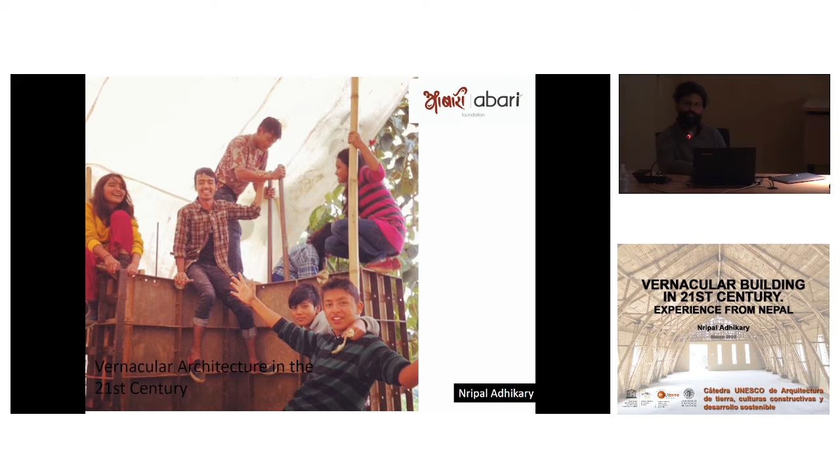And it was not associated with poverty, but associated with wealth. I was very impressed. I was like, we have amazing architecture in Nepal.

If you know Nepal, it's between Tibet, the China border and India. So there is a lot of confluence of different culture, different geography. A lot of people, when they think of Nepal, only think of the mountains, of Mount Everest, but we have plains also. When I was going this morning with Fernando, the rice field reminds me of home. And also we have the mountains, of course.

So between these two geographies, we have a lot of interesting architecture. And the interesting part is it's still alive, but slowly it has a bad image of poverty, even though it's still alive.

So for example, you see a lot of buildings here. These are buildings up in the Himalayas with rammed earth, and also in the mountains you have adobe, but it rains a lot, so we don't have flat roofs. Here we have tiles, but this is all adobe. Interestingly, we don't use a lot of lime, but we use a lot of earth, and a lot of adobe.

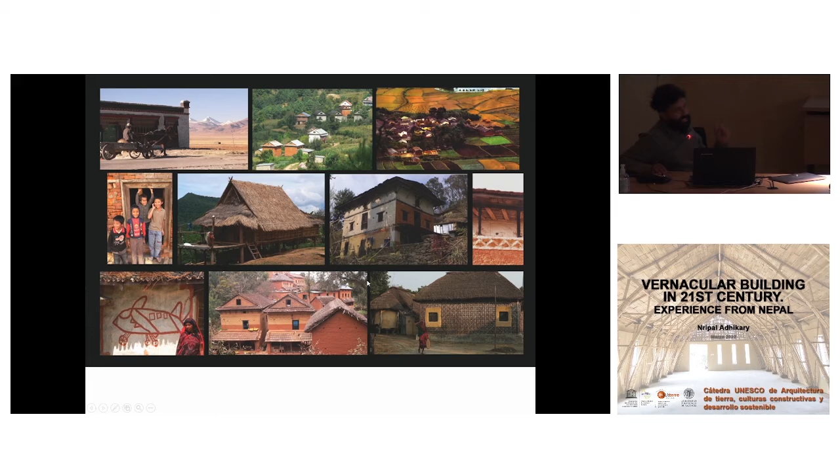And I've been doing a lot of studies and documenting them. For example, this house is about 300 years old, made with burnt bricks on the outside and adobe on the inside, a lot of wood. Mostly what happens in traditional architecture, the material is free because you just go to the forest, you get your wood, you have stones everywhere, you have earth everywhere.

And we have this really interesting tradition of helping someone else build a house. So if I'm building my house, my neighbors will come and help me. And we keep track of how many days: if he comes and helps for 5 days, I have to go and help him for 5 days. That tradition is slowly dying, but whenever people built these structures, that was how they did it.

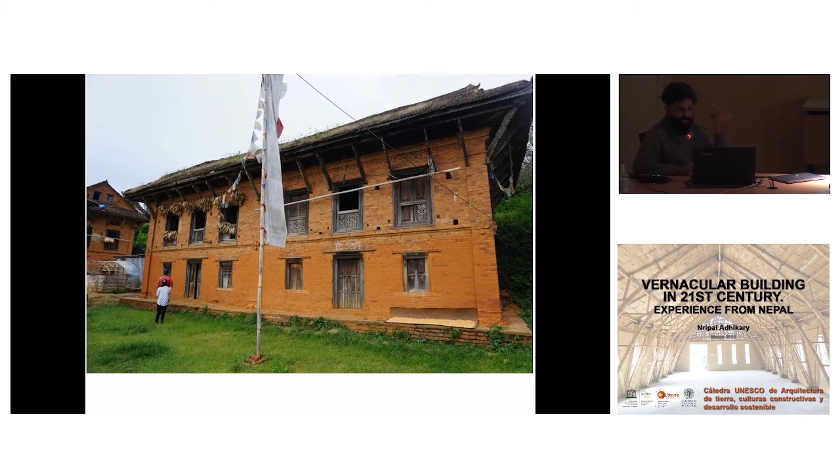Or if you go in the mountains, you have this stone architecture, all dry stack stone. This would be around 5,000 meters. There's a lot of earthquakes, but they have a very interesting technique of tying with wood for reinforcement, like here.

And they have like a courtyard. For example, the roof of this is a road for the neighbor's house, so it's all connected.

Or in the plains, we have this earth architecture, and there's a lot of rain, so a lot of what we call maintenance, but they don't see it as maintenance, they see it as a ritual. For example, every time it rains, after monsoon, they come and they paint their house with different colors, all natural colors, pigments. So, really interesting traditions, which are still alive.

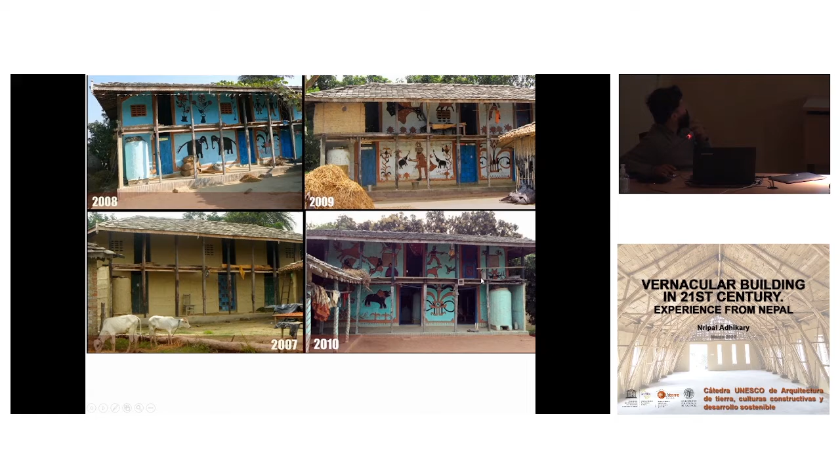Or like some traditions are unfortunately dead. For example, this bamboo bridge, about 30 meters, built in 1895 with bamboo. But this tradition is gone because no engineering school teaches it, no architecture school teaches it. And this is a sign of poverty, right? Even though it uses everything local, everything, it has so much craft involved.

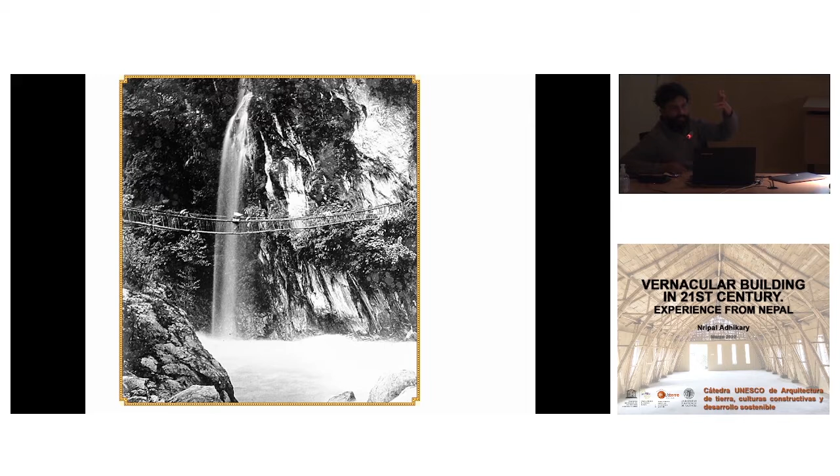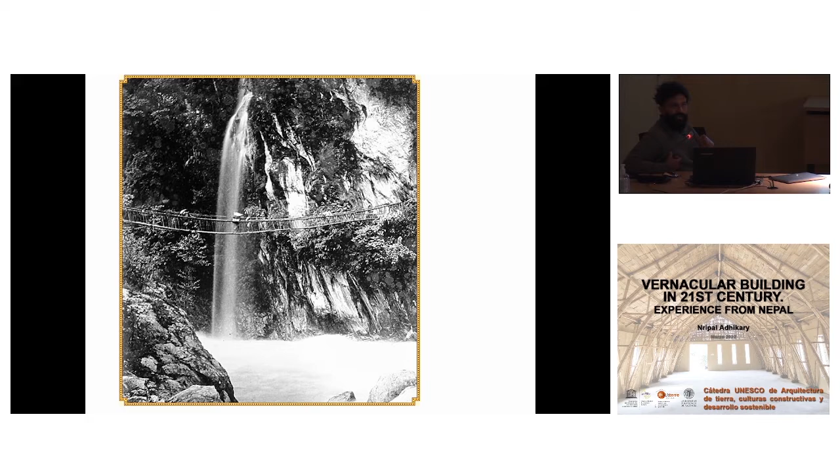Or another suspension bridge, which we have here. And so the tradition is lost. And in Nepal, there's a lot of inaccessible areas, so there are places where we cannot bring foreign materials, or we don't have the economy to bring foreign materials. So people cannot afford it, and they have to use a very scary way to cross the bridge. This is not Photoshop, this is real. Like this, you have a steel cable, and kids are crossing to go to school every day.

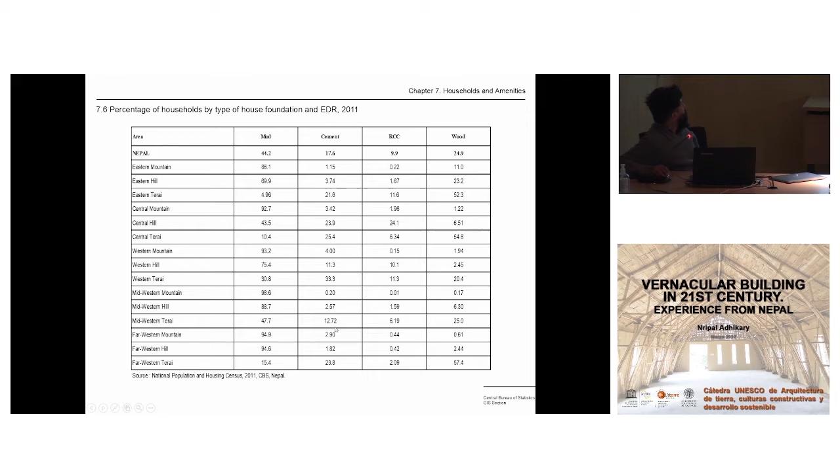So there's a lot of contradiction between what we have versus what is our aspiration, right? And just to make this point clear, for example, the whole country of Nepal, the cement level is only 17%. This is the whole country. And in some areas, there's as little as 0.2% cement. This is according to the census of 2011. A lot of wood, a lot of bamboo, a lot of stone, a lot of adobe.

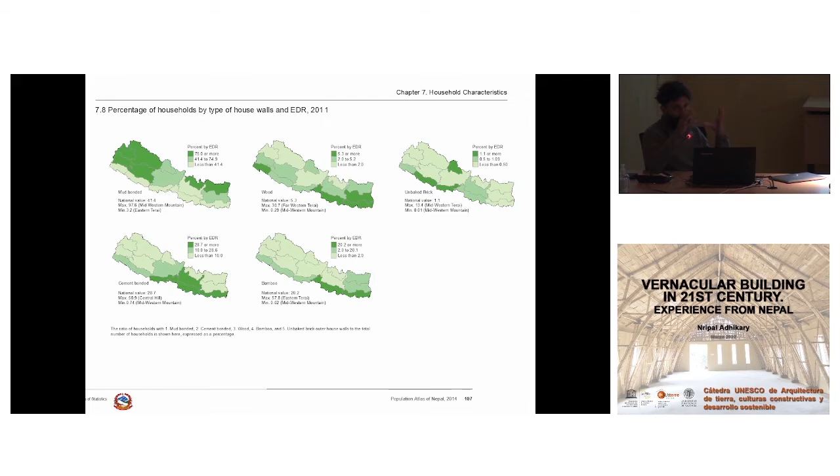And if you, I don't know if you like the image of Nepal, whenever people think of Kathmandu especially, there were a lot of hippies that went to Kathmandu in the 70s. So it has this image of Shangri-La, right? And it does have one of the highest number of World Heritage Sites, about 10, cities, not only structures. And here's like one area.

This is not a World Heritage Site, but this is one neighborhood. You see beautiful earthen buildings, 2-3 story. This is in 1967, and then you'd have nice rice fields in front of the house. Sometimes reminds me of your architecture here.

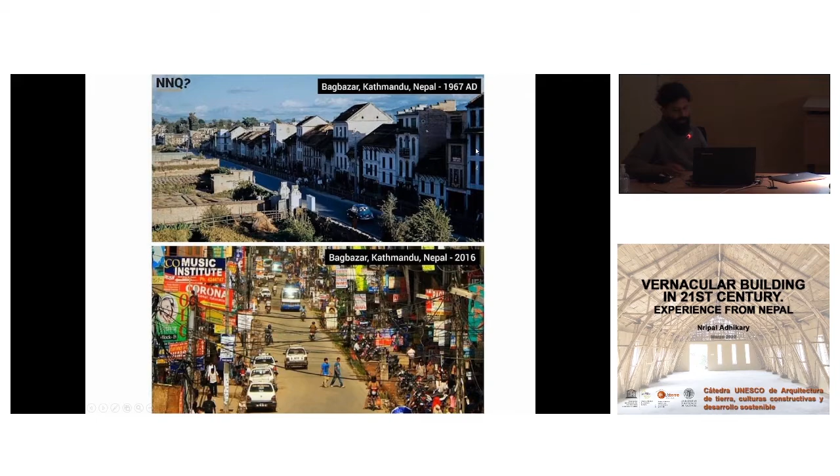But this is what we've done to the same buildings now, with concrete, right? This is with urbanization. It's gone from such a Shangri-La to become a concrete jungle. And this is what we have now in Kathmandu.

It's terrible. But why, even though we have an amazing history of vernacular architecture, why are people building with cement, right? There's nothing that traditional material can't do that modern can, but it's even better actually in terms of thermal performance, because there is that illusion that cement is strong and that it will last hundreds of years.

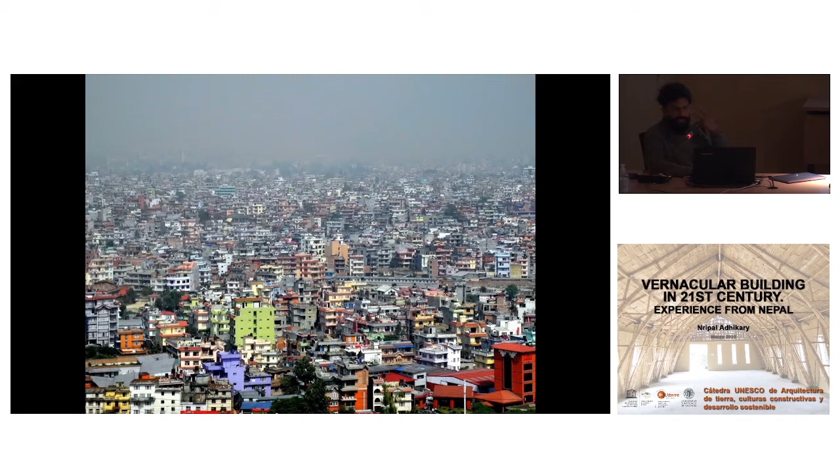But in the last earthquake, you know, this is at the epicenter, the concrete buildings also collapsed like a house of cards, you know, there is nothing you can salvage from this. And it costs a lot of money, there's nothing recyclable.

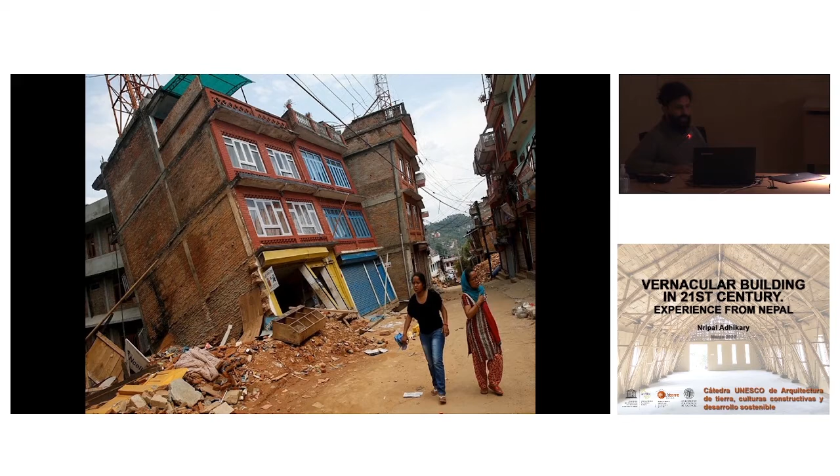So, on the other hand, properly built stone buildings, this is also taken from the epicenter of the earthquake. It can survive, right? So in this context...

I wanted to do something, as a young architect. I didn't want to conserve, because the tradition is still alive, right? It's not like the European context where it's losing, where you need to conserve. But the biggest problem was, how do you take this tradition and put it in a modern context, right? The skill set is there, the material is there, but no architect had taken it to put it in today's sensibility.

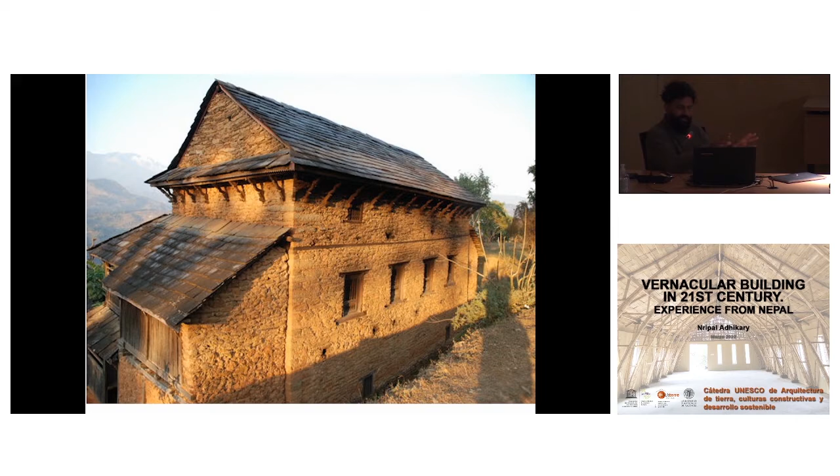So I started this organization called ABARI, to take tradition and put it in modern context, right? So this was what we wanted to do, take vernacular and put it in today's context.

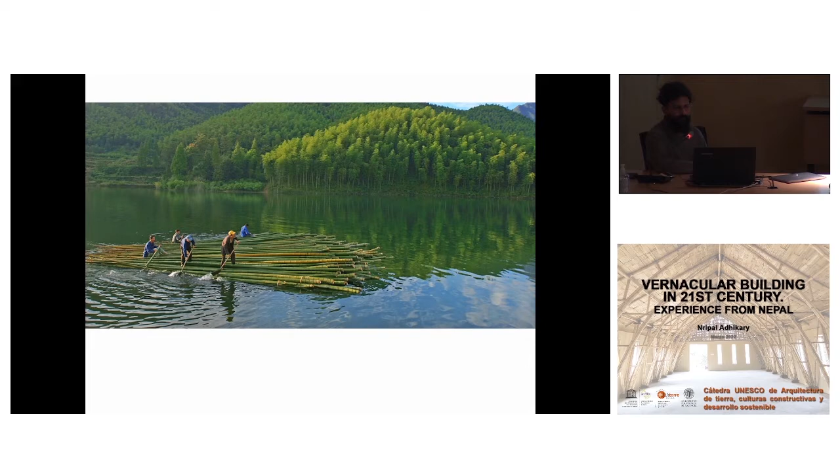And two of the main materials that we used are bamboo, of course, and earth. Earth because, as I showed you, it's everywhere. It can be earthquake resistant because it's a monolithic, thick structure. And bamboo because it's very lightweight and delicate. For people who are not aware of what bamboo is, it's basically grass, the same family as rice, right?

So the more you cut it, the better it is. It grows faster and better. And we have about 54 species of bamboo.

In terms of strength, it can be as strong as steel in tension. A lot of people compare it to steel, but I think it's even better because steel is strong but heavy, while bamboo is strong but lightweight. So you'd rather compare it to materials like carbon fiber, which is used for airplanes. In terms of density, it's like bird's bone—very lightweight and earthquake resistant. If there's an earthquake, like we've seen in our buildings, it moves like a spring and comes back to shape. It's really interesting.

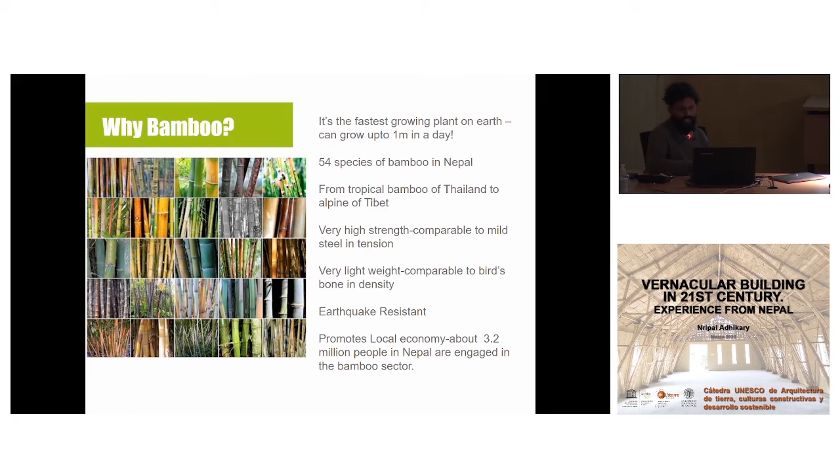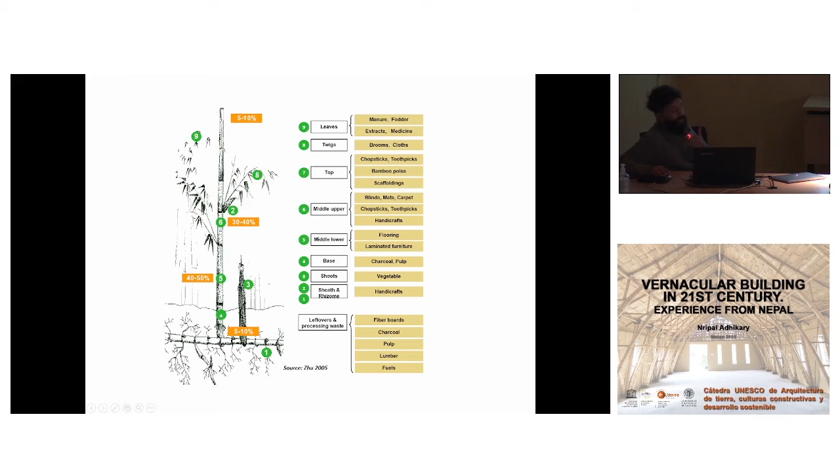We have a lot of people engaged in this sector. And with bamboo, nothing goes to waste. For example, if this is a bamboo plant, the leaves you can use for fodder. When it's small like this, you can eat it. When it's big, this portion you can use to make fibers. The bottom you can use for construction. It's amazing—we call it vegetable steel. It's such an amazing material.

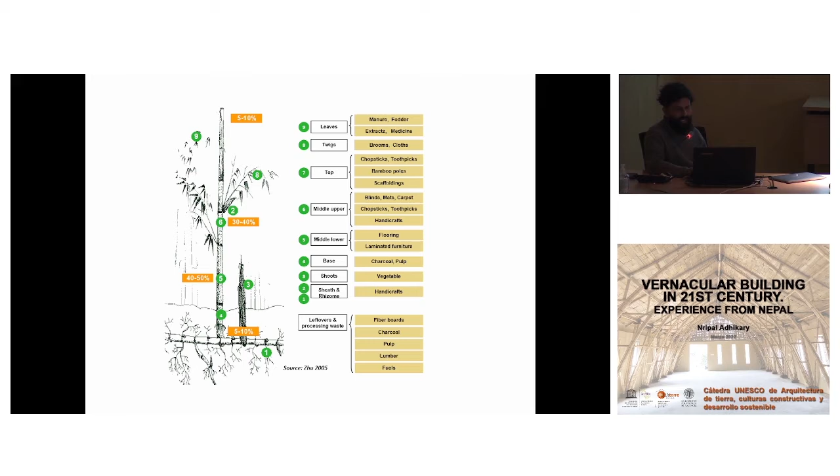So when it's less than 30 days old, you can eat it. Up to one year, you can make it into fibers. And when it's old, you can use it for construction. So it's something that can give you fibers, food, and construction material. It's an amazing material, and if you look at where it's found, it's mostly in the global south.

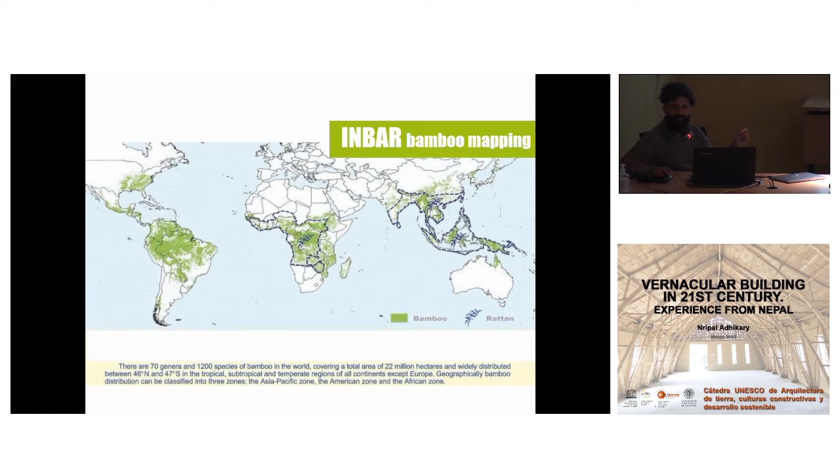My correlation is that areas which eat rice use bamboo, because it's the same family. And if you zoom in with a microscope, you see bamboo is a collection of tubes. Tubes are one of the strongest shapes in construction geometry. But this is even more interesting because it's a composite of tubes—you put these tubes together and they work as one unit, so it has a lot of fibers and can move. Because of these long fibers, it's also used in fabric.

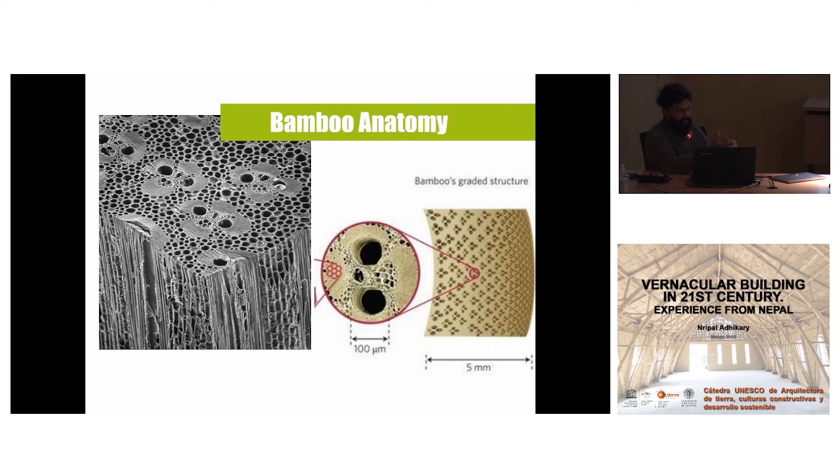All these tubes are also like leaves—they're also doing photosynthesis. That's why it grows so fast.

But if it's such a good material, such a strong material, why aren't people using it? That's the main question. The main issue is that it has a lot of chlorophyll in the stem and a lot of sugar, which makes it more susceptible to termites. If you look at these tubes, you can see a lot of these sugar modules. Because of that, it gets infected by termites.

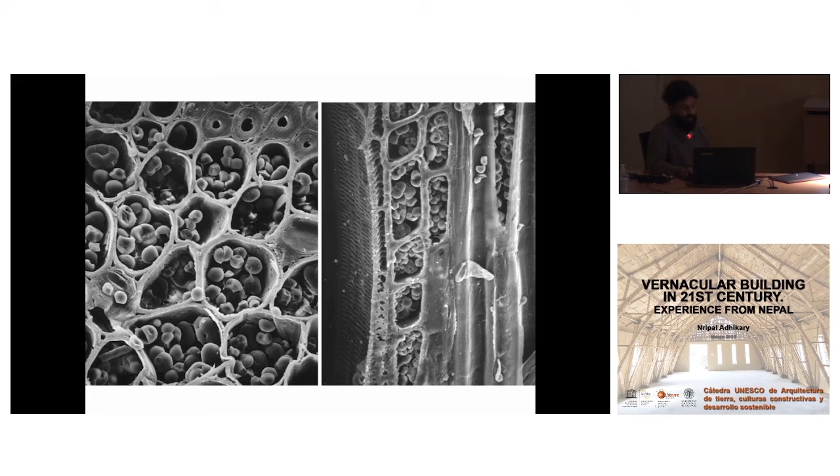So we did a small innovation. We took a cylinder like this and added a preservative, boron compound, and used a bicycle pump to create pressure in that preservative so it's pressurized. Once pressurized, we have a pipe connected to the ends of the bamboo. When you connect it to the ends, the pressure pushes the starch and sugar out, and then you replace it with the boron compound. It's amazing—a very simple technology but very effective, because you can take it anywhere, you don't need electricity.

So we did a lot of construction with that, but as we grew, we also built a centralized industrial plant. That was one major innovation—extending its life. Usually if you don't treat bamboo, it lasts 3 years, but if you treat it, it can last 100 years. That was a major innovation we did.

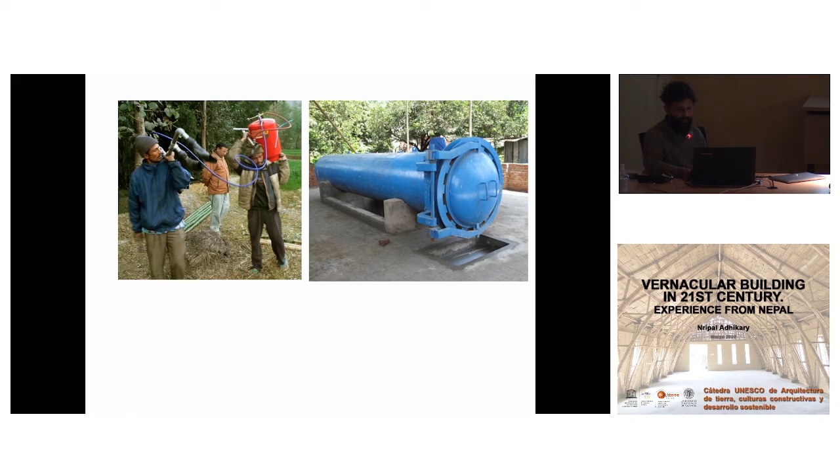Another innovation we did was the joint. Bamboo is hollow inside, so it's not like timber that you can cut into a fixed geometry—unless you do lamination, like they do in China, where you take strips and laminate and build. But that's a very industrial process and makes it expensive. So we wanted to use round bamboo because it has amazing properties. But the problem with round bamboo is that you can't cut the geometry, and it's not perfectly round, so we had to devise a joint that would handle all the asymmetries.

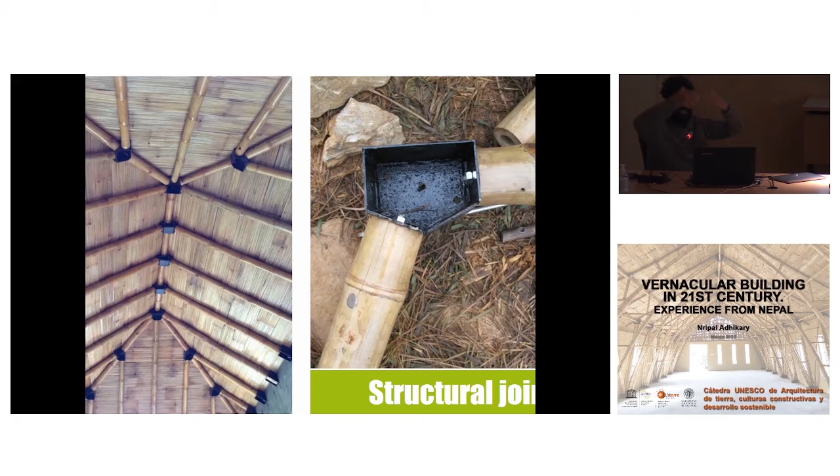So we designed a very simple metal system, like here—we use this IKEA-type joint to connect two pieces together. You can connect more pieces if you need. That was a major innovation that really helped in making large span structures. After this, we felt we'd solved these technical problems, so let's start building. My interest was to build public structures.

Private structure is tricky because people don't want to be the first one to build like that. But public spaces, schools, people are more open towards doing that. And also there's more need for public spaces. If you look at vernacular architecture in the beginning, they have smaller structures for homes. But more public structures like schools and hospitals are more like a modern innovation. So we need vernacular architecture to do this.

So my first project was to build a community hall where we use bamboo. We took bamboo and made an arch, like bent it and built this structure, kind of like a Gothic arch, bundled them together and bent it. For a first project, it was pretty successful, it was very strong, and people really liked it.

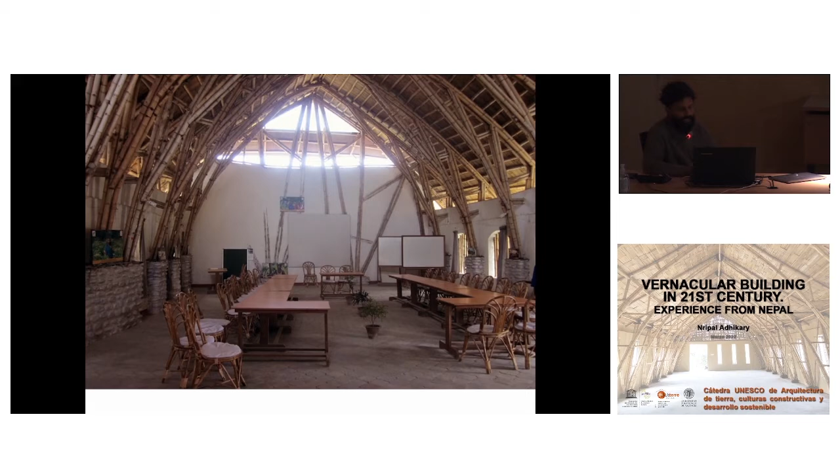One of the major outcomes was there was a lot of acceptance. People were like, oh, this is interesting. And then the second project was I did a school.

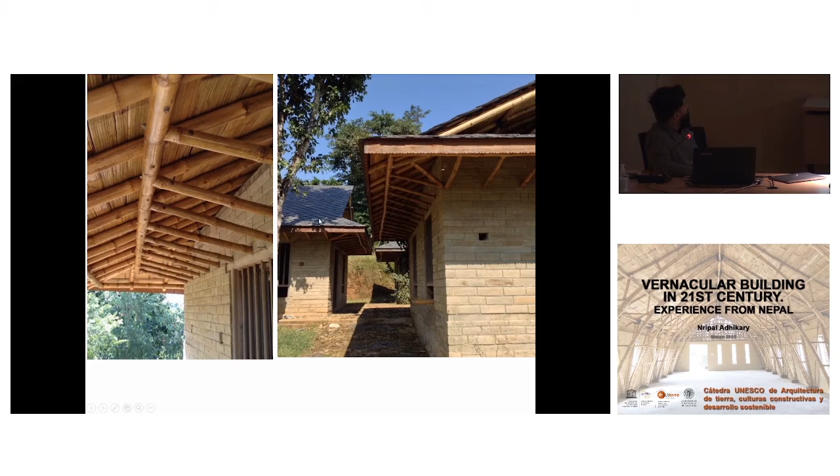It took a lot of time. After this, I was very tired because it took almost 3 years to build this. It was very amazing to see that you can build something with local material, you can build something beautiful. But it was too difficult, and I was like, okay, I can't do this anymore.

Interestingly, what happened is this was the building - in this area there was a big earthquake, the last Gorkha earthquake, this was the epicenter. And this was the only building that survived in the whole area. All of a sudden people were talking to us, and we became like, we're in the news - earthen building stands the earthquake - it was on BBC and all this international media. All of a sudden we had credibility.

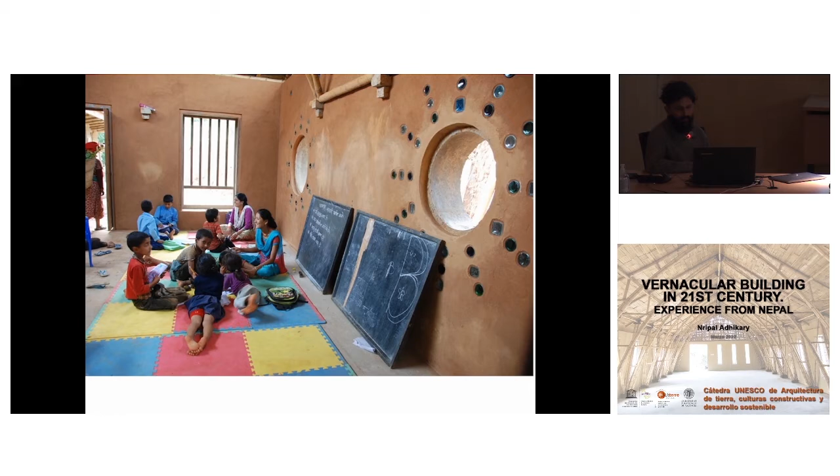So what we did is, we were very excited, and we said okay, let's build more schools like this. So we took the government school and made it more natural, so to speak.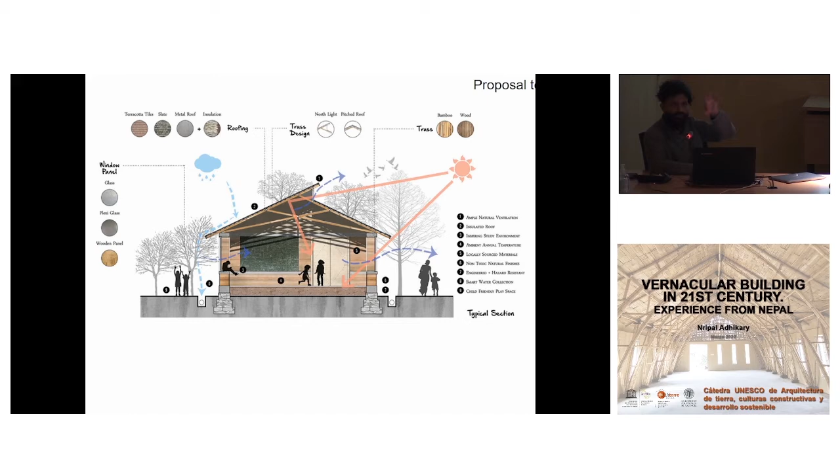We put nice insulation, did some design changes, added ventilation, nice colors, nice niches, and made it modular. The idea was after the earthquake we had to build many, many schools. So this was an open source document - we put it on the internet so people could just copy it. And doing that, we built many schools.

Here the walls are with earth, and there's bamboo. Interestingly, people ask me why we have these cement bands. The cement band is mostly for psychological safety for the people, because there's confidence in steel. If you put the steel, they go like, oh, okay, this is safe, even though we don't really need it. So we have these concrete bands in public buildings.

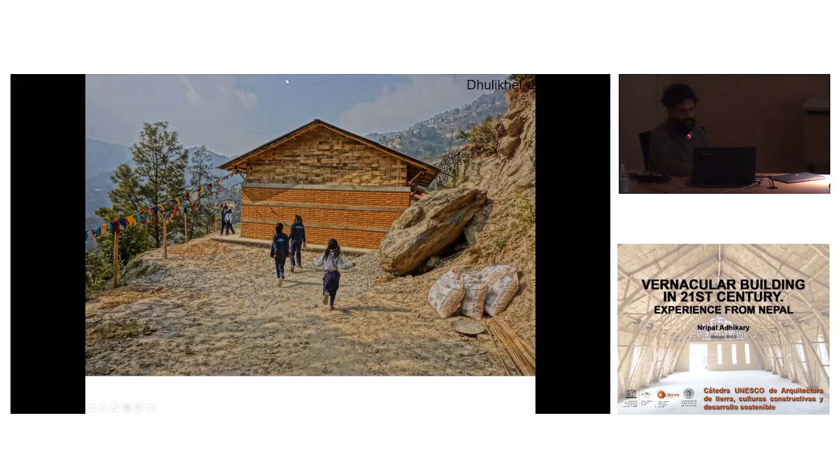This is with earthen blocks, and this is like a government school, a very humble school using this. If you look inside, you have a nice truss, creates a lot of insulation, and also the furniture is bamboo.

So the best part of this was the technology was very decentralized - a lot of people could take this technology. Actually, the women were building all these bricks. It was very simple: you put the mix in this hopper, and then you press it, boom, it comes out - you have the bricks.

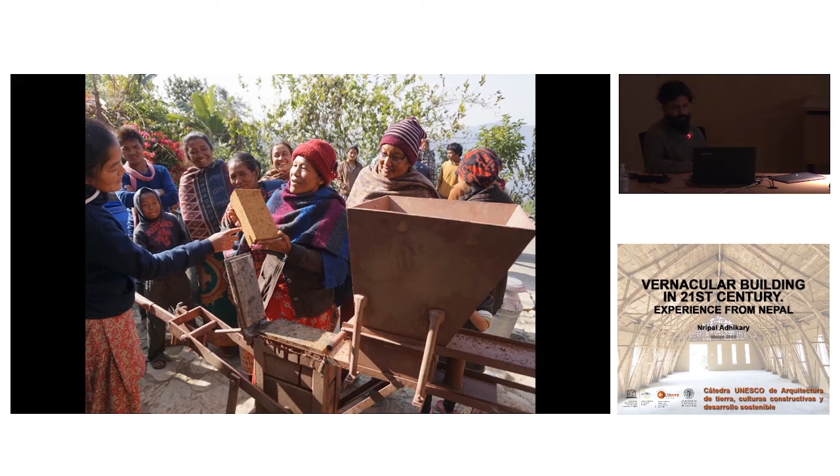We did a small budget analysis, and about 89% of all the budget stays locally. The local material is about 54%, 35% is the labor cost, only 11% is foreign material. So people ask me what is the cost, and I always say it's a good cost, whatever it is, because it's staying with the people - it's not going to an industry.

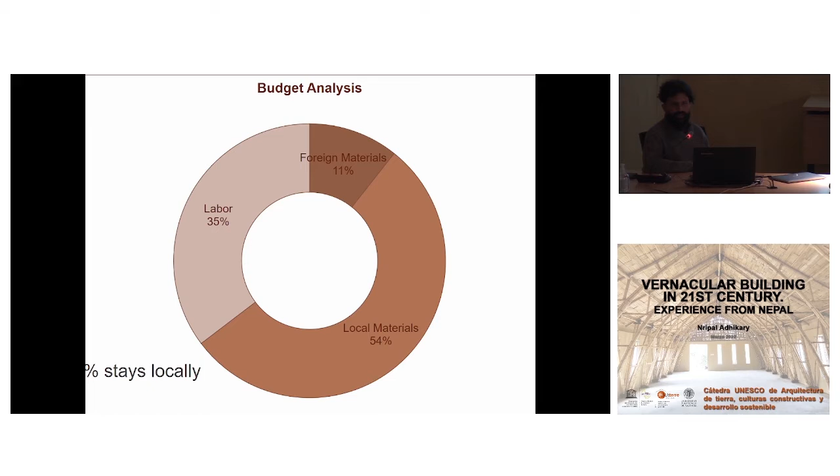After the earthquake, we put out these open source documents and people were copying them, but also as architects we wanted to do something bigger. So we took the tradition of tapial and what you call half timber - we have a lot of tradition with building with tapial, 2-3 stories, and then with half bricks or half timber, we call it wattle and daub.

This is how this works - this is a photo from Bhutan. What they do is the men put the formwork, and women come and do the ramming.

I want to show this video that I took.

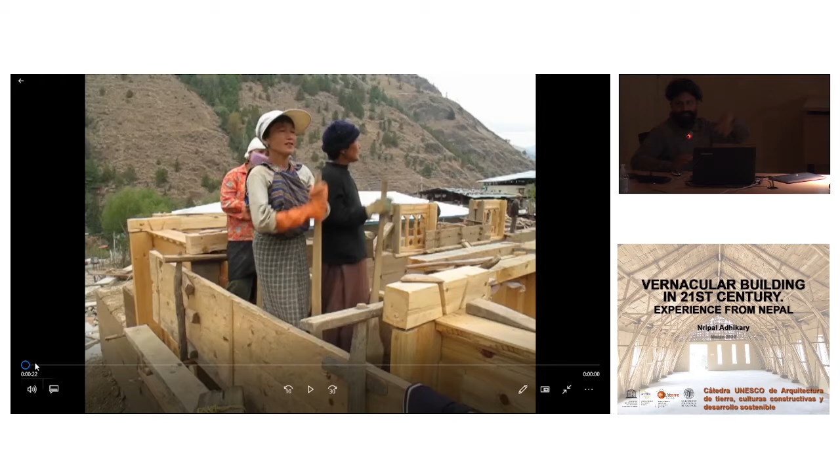So the men do the formwork, and during the day people go to the farm, do their work, and in the evening they come back and help in construction. You can see it's very joyful.

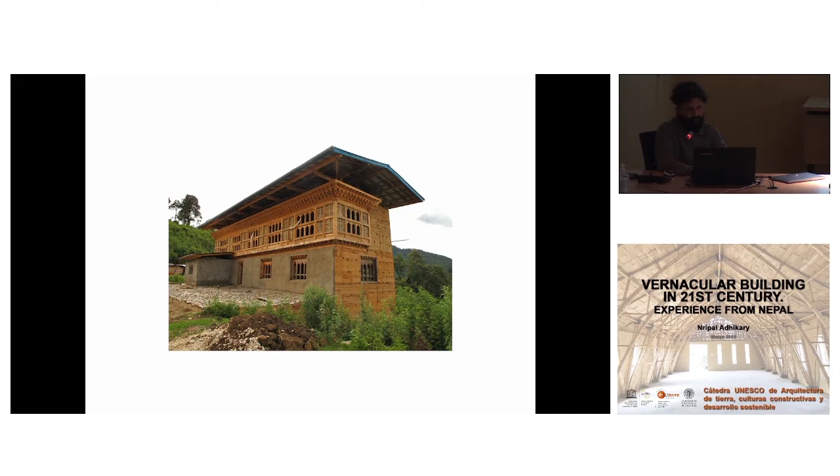Once the song is finished, the ramming layer is also finished. So the length of the song equals the length of the work. People think ramming is a very difficult masculine job, but people are just doing it. They're laughing, enjoying, drinking, and doing it. It's okay, it's good.

So we took this technology and then we improvised it. I also saw that usually the tapial is very big, so we added a few elements to make it thin, meaning about 40 centimeters. People before used to have thin formworks, very small ones. Here we used bigger ones, so you can get a nice finish.

And we use natural pigment. We have a lot of colors. This is not even pigment, this is natural earth, white earth, red earth, to create patterns. So this is how we've taken the traditional material and put it in our context.

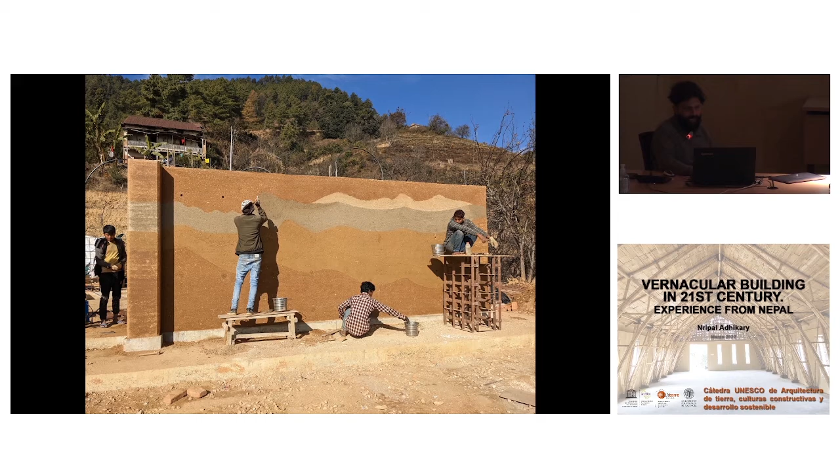For example, what we do is we have a foundation. If you don't know, this is a very high seismic zone. So we have a stone rubble masonry, and then a layer of damp proofing and concrete. This is the only place where we use concrete, here and the bottom, and we don't stabilize our earth, because, as you know, it changes the thermal properties.

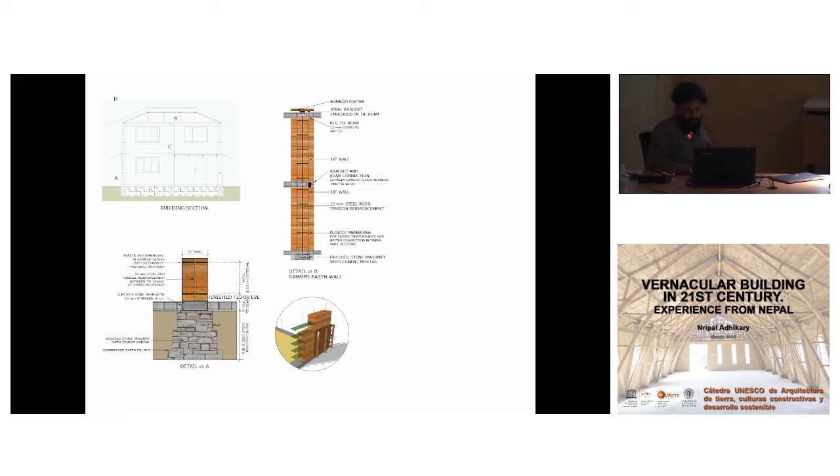And then we put rebars in the ends, corners, one 12mm rod in the corners for seismic performance. And then every 50 centimeters, we put polymer mesh, like you see here, like this mesh. So this is to create that earthquake resistance.

I heard before, when in China they were making the Great Wall, it also has tapial, and they used bamboo and fibers to do this. But we don't use that here, because whenever I use bamboo, it's a natural material, so I want to make sure it's in a place I can access, so in the worst case, if something goes bad, I can change it.

So inside, here we use the polymer mesh, but the earth is not stabilized, right? It's just pure ramming, pure earth, like the ones you see here.

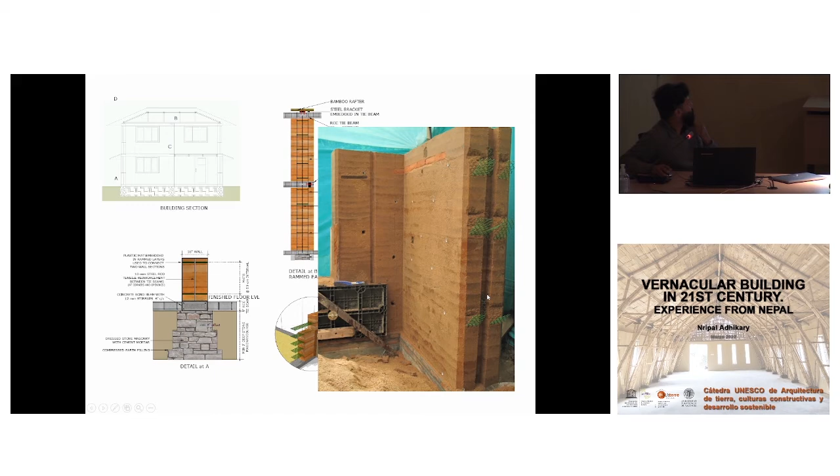And we have a big formwork. For example, this is one formwork. From here, this is the edge, so this will be one formwork. And when we join, we have this groove, and it connects to this.

It's really interesting, because we thought this would be a very good material for social housing. But interestingly enough, the people who are poor do not want to live in earth. It's usually the people who want second homes who are more interested in earth. So after the earthquake, we gave a lot of free design and technology, but it didn't scale as much as we wanted. Who is interested is more the educated, economically and ecologically conscious people.

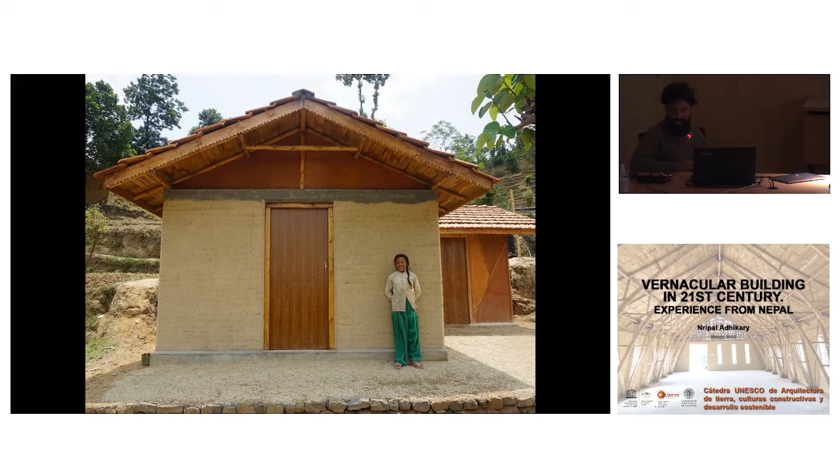And we got a really nice opportunity to build a public library in Kathmandu, in the heart of the city. So here we built this public library, and here we use a lot of traditional techniques.

For example, in terms of engineering, what we did is this structure is independent of this wall structure. This is how people built before. So imagine if there's a really bad earthquake, the walls would collapse, they would fall outside, but the roof would still be there. That's an interesting element that we added.

This is all half timber, and also we use just earth, we don't use any stabilization. And it breathes. What we found is this library has a lot of old books, and the moisture content inside was always really constant. It didn't become dry like it would in an air-conditioned environment. But of course we added some modern elements of light, electricity and plumbing. So it was a really good combination.

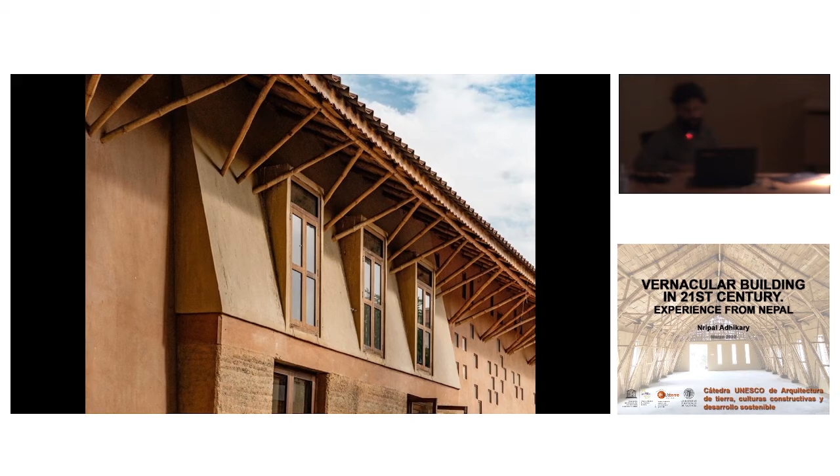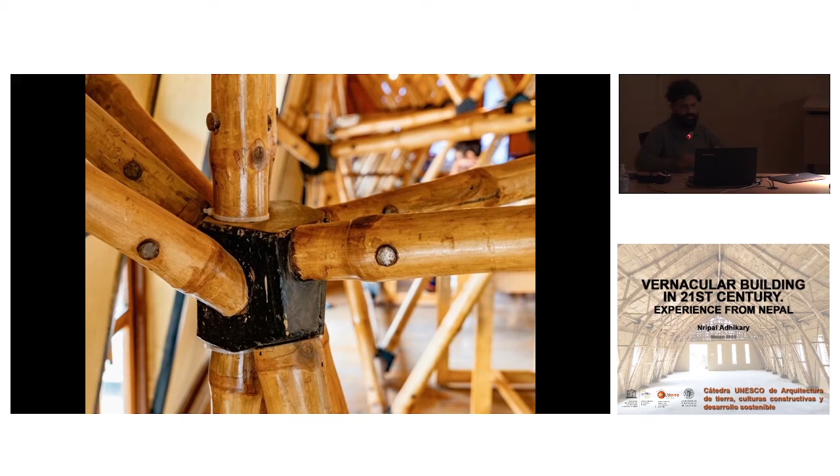Big overhang roof, and here are some of the joints. With this joint we can create a larger and stronger structure. Here's different angles, here's the school.

So we created a very interesting mesh. It's like a vaulted structure, but what's interesting is since bamboo is lightweight, you can curve it. It's like a three-dimensional vault, right? So you can do a lot of lateral connections, like you see here.

The mantra of cement engineers is when in doubt, put more steel. But for us, it's when in doubt, put more bamboo. And also, it doesn't look bad.

Sometimes it's really hard in terms of engineering because people are hesitant, because it is not a standard material, there's a lot of variation. But we have a really good engineer friend who's very intuitive, because designing something like this is like building the old structures.

It was also about the geometry, having the right geometry is very important. So we focus a lot on the geometry, getting the crosses, the truss, and getting the curves right.

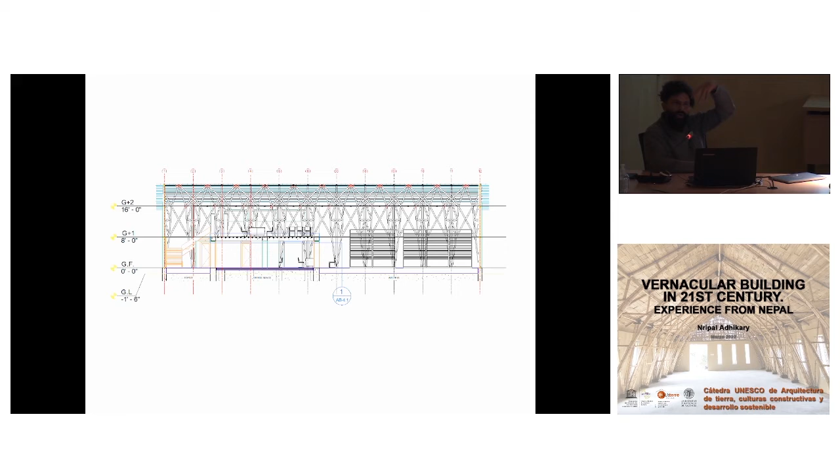If we are a little bit doubtful that this may or may not stand, we add another element. Apparently you call that a hyperstatic structure in modern engineering - if one thing falls, the other will help it stand. So we built this two-storied structure, and that's the Architectural Review Award we got for this one.

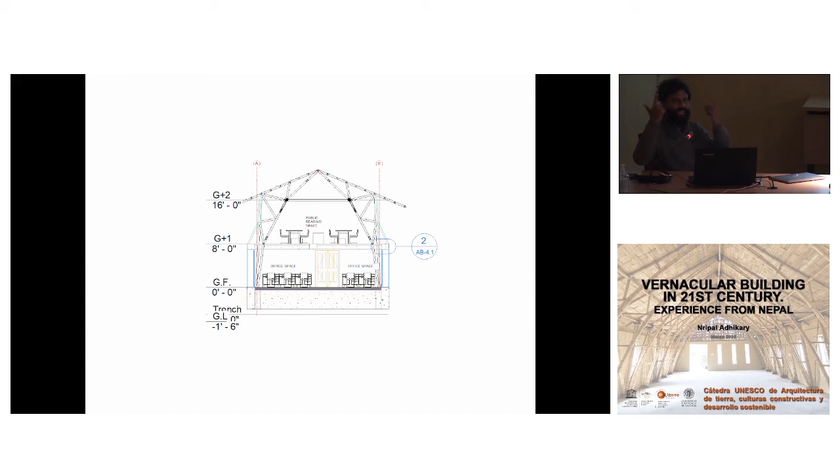What we've realized over the years is it's not a technical problem with earth that's keeping people away, it's the perception. As we know, there are structures thousands of years old built with earth, but it's not a technical problem - people just think it's not good enough. So we are trying to push that envelope.

Here's another school we just recently finished, it's in a very hot climate. It's built on passive solar design principles, so we have a large overhang roof. We are working with a lot of challenges - one is earthquake, the other is rain, the other is perception and material.

This is a school we did. It's a 2-story, and you can see this is also tapial. It's a gradation from red clay to yellow clay - I don't know if you can notice here, it's a gradual gradation.

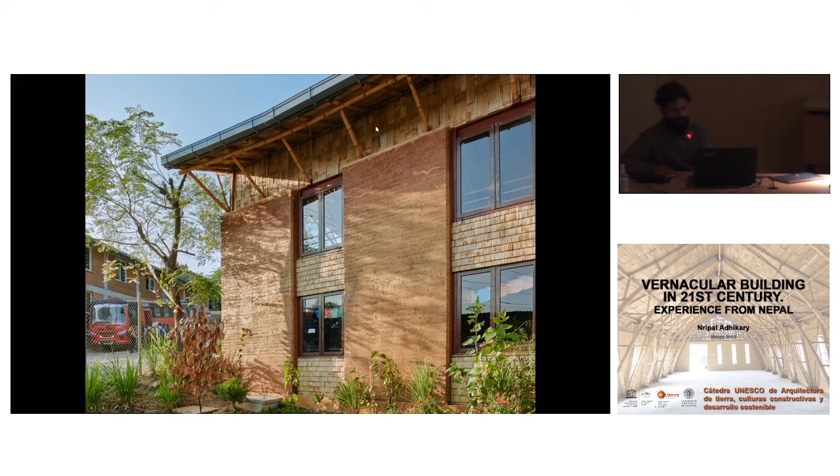Here's the design - this is rammed earth. This is a classroom, so you have a classroom and then open space, classroom, open space, so the students can be here or work from here, and also move around. It's a limited space, it gets very hot, so this is how it's designed.

In earthquake zones, another problem is we cannot do very complicated shapes, we're usually limited to either circle or square. So if you want to make a complex structure, what we have to do is isolate them - like this is one, this is another one, this is another one. They are not connected, but they are in between.

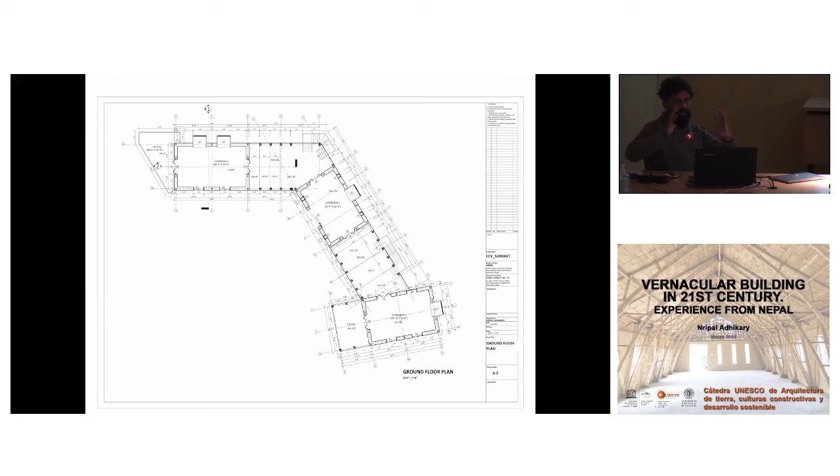We have bamboo, so bamboo works as an accordion, right? It helps in taking the stress. So here's the bamboo structure, and then rammed earth, bamboo, rammed earth.

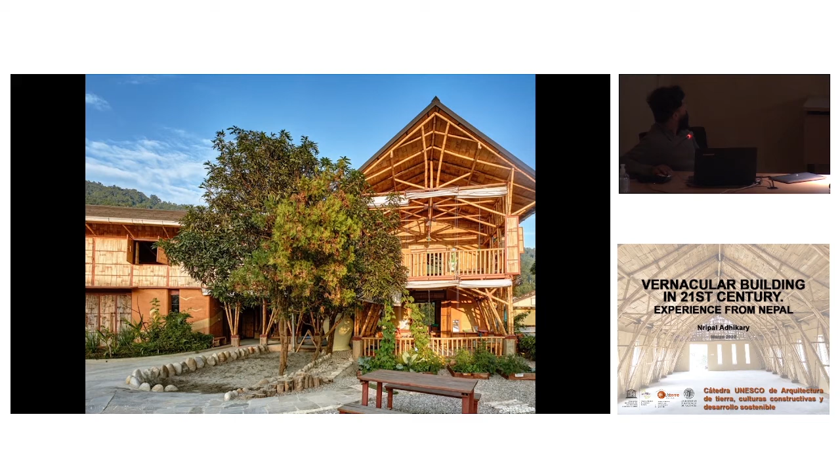Here's the bamboo, right? We are collecting water, we even made this water tank. We're trying to be very ecological - we don't have decorative ornamental flowers, we have vegetables, so kids can come and take the vegetable and go to the cantina and cook with that.

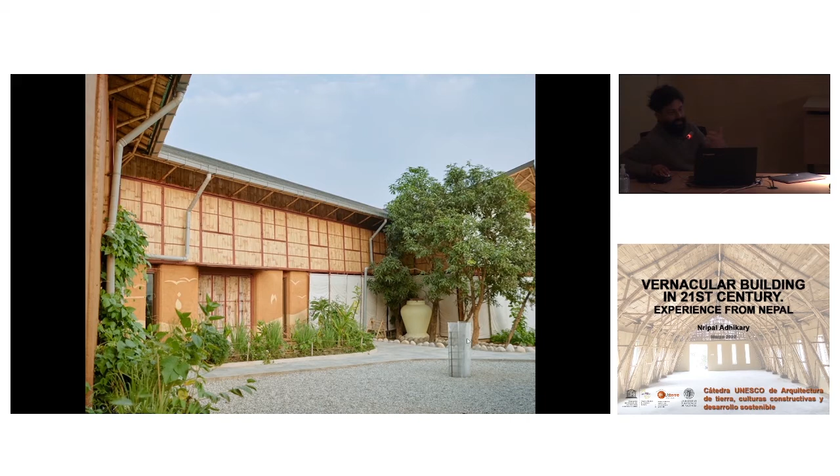The innovation we've done with this bamboo structure is, if you usually see in other places, they bundle bamboo together, putting 1, 2, 3, 4 bamboo together. Here we don't do that - we've really studied the property of bamboo. Bamboo has fibers - if this is bamboo, and you put load in this direction, it can take a lot of load.

But if you put it like this, there's a lot of flex, it's very elastic. So we designed everything basically like an arch, so all the load kind of goes like this. When you do that, people see it as a limitation, but I don't see it - it's like, you can move.

We are trying to do a lot of public buildings, and also for private people who are paying for this, with a limited budget. So we have to make sure that it is safe, there's zero maintenance, and it's strong.

When we do this cathedral-like, arch-like structure, it has the added benefit of making it like a monkey climb for the kids. They can climb, so we encourage them to. Sometimes you go to the classroom and the kids are hanging from the ceiling because there's a pathway for that.

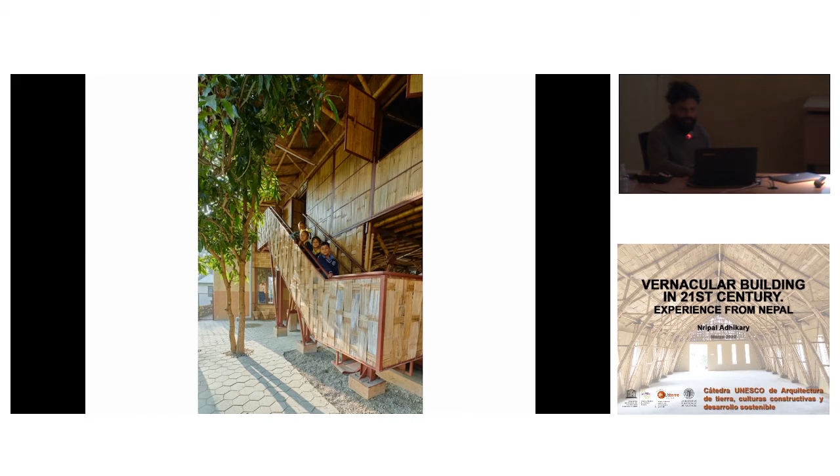And here's like the stairs, with bamboo. You can really get nice weaving inside this tapial. Sometimes for reinforcement, we put steel in a larger span just for the beam because of flex. So we are not bamboo fundamentalists - if we have to, we have to, because we're trying to make a statement that it works.

When we combine other materials, it's for what it's good at. For example, we think concrete's really good for the beams, but we don't want concrete in our walls. So it's about using the materials for its right properties.

Here's another view. And so we are also slowly moving into residential properties. Actually, it's very difficult because residents have a lot of requirements and they're very picky. But if we can get into private buildings, that means we have the trust of private clients.

They are not painted, they are rammed like this. It's like, because you do not see what's happening, you just go like this. We make them redo it. So what I usually do is, if this is inside the ram, you go and draw in it. So it's not, of course, very smooth and it's pixelated, but sometimes they mess it up. But also, it's a forgiving material - if it goes wrong, you can remove it and ram it from the side. But that's a lot of work, and I don't encourage it.

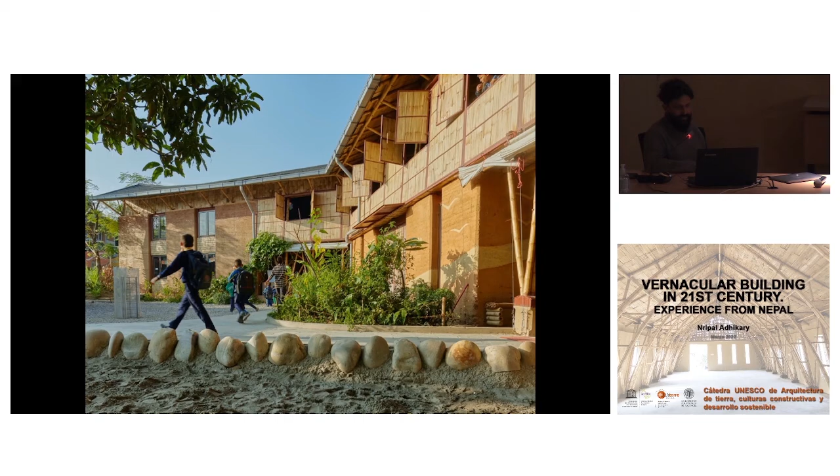So we built our own house just outside Kathmandu to show an example that it is possible, that you can live a decent life. Here's something we did after the earthquake, before the earthquake. We took the old foundation, and we used local material - literally nothing comes from more than 100 kilometers. The earth comes from 5 kilometers, the wood from 5 kilometers, bamboo comes from 100 kilometers, but that's about it.

In this house, I used about 20 bags of cement. That's for the foundation, that's it. A normal house would use anywhere between 2,000 to 3,000 bags of cement. Those are for the reinforcement at the bottom. And it's passive solar, of course. We use a timber floor, and we don't use any paint.

So we don't use any paint for the floor, to get the natural smell.

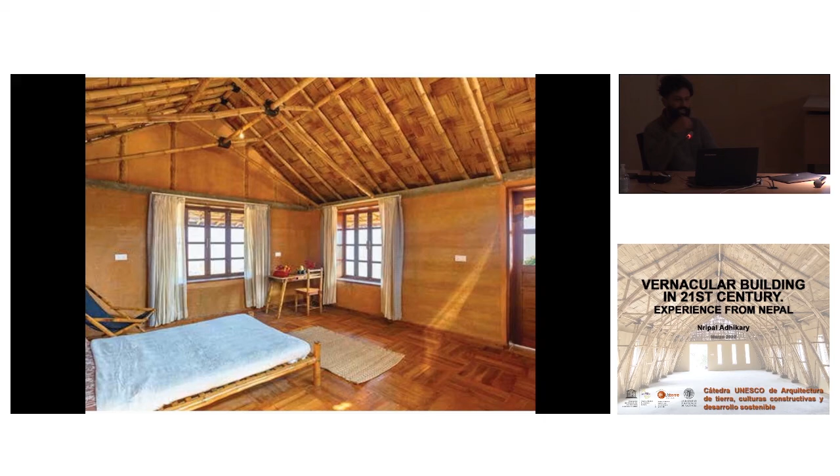One thing I learned in Austria from architect Martin Rauch was using casein for waterproof paint. Here we have some overhang roof, but slowly I'm becoming more comfortable that we don't even need this big roof. So in this tapial we paint it with casein - do you guys know what casein is? Okay, so we paint it with this to make it waterproof. This has been up for 7-8 years, and there's been absolutely no problem. It's strong as a mountain.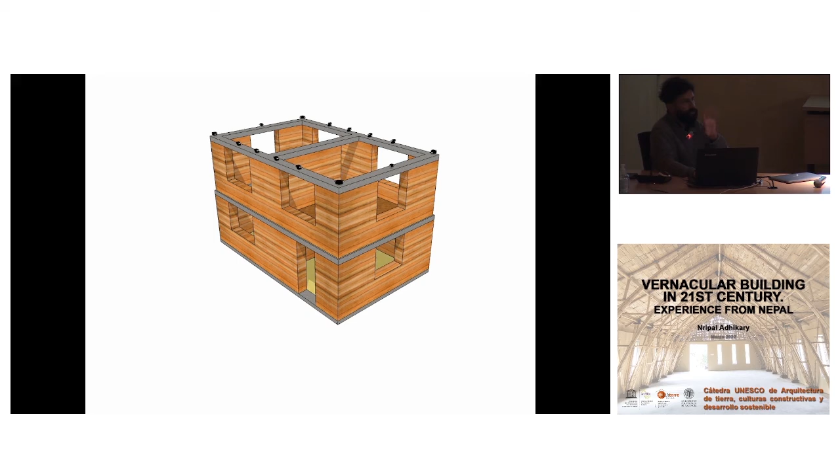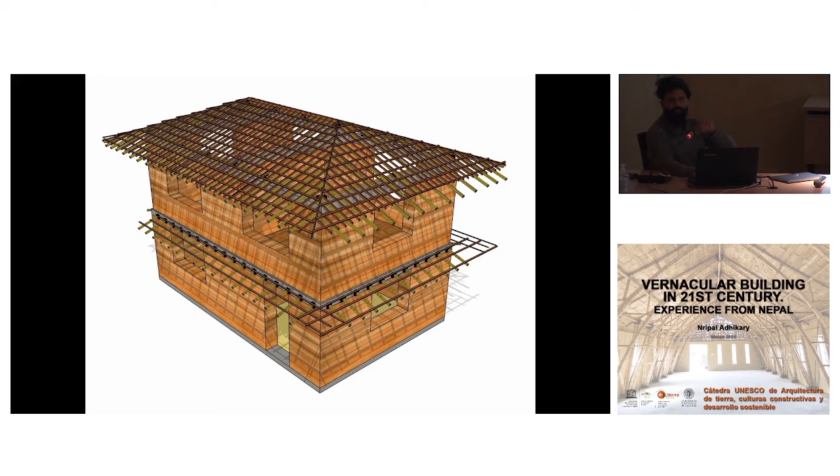So here's just a quick overview of what we do, how we do the foundation. These are the rebars on the corners - very thin rebars - and then just ramming. We've created this module of construction, and people have been following it - now there are dozens of builders who followed these manuals and footsteps. And here's the roof - I think bamboo and earth is a really good combination because the rammed earth creates that base, and bamboo creates that flexibility.

This is also earth, the paint, the roof - the red clay, the yellow clay, everything. Here's another roof we do - this is a private residence, so that shows that it's gaining acceptance, slowly.

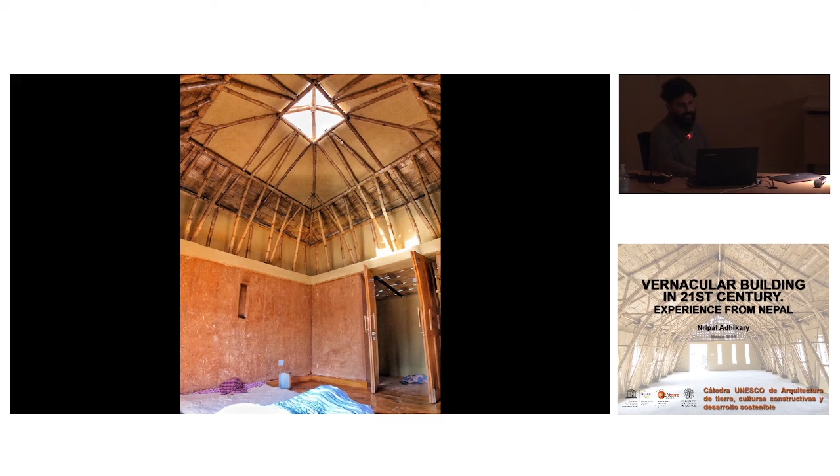Also public buildings, like these. So it's become - we are a design and build organization.

So we do very limited buildings, maybe 2 or 3, and that's enough for us, because what we're trying to create is a whole supply chain of craft. There will be another presentation, but we do a lot of furniture, a lot of craft, and in the next phase I want to show you how we source bamboo.

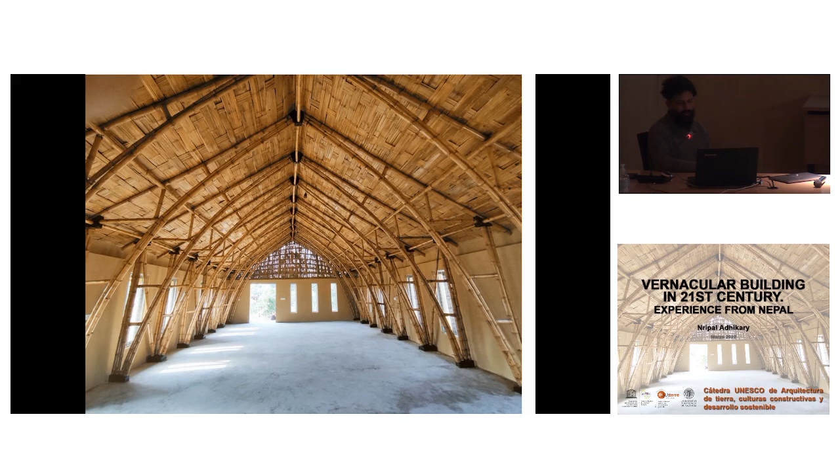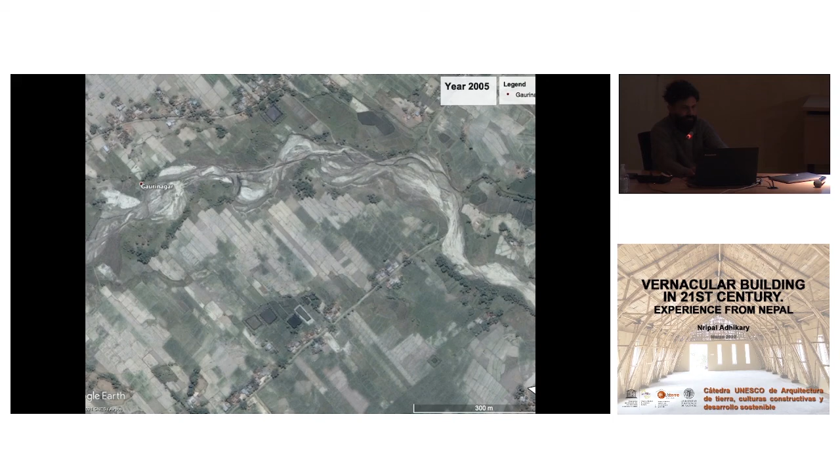We use this bamboo to create craft, to create buildings, to do nursery work, trying to create that holistic cycle. So for example, this is 2001, 2005, 2010, there was a huge flood.

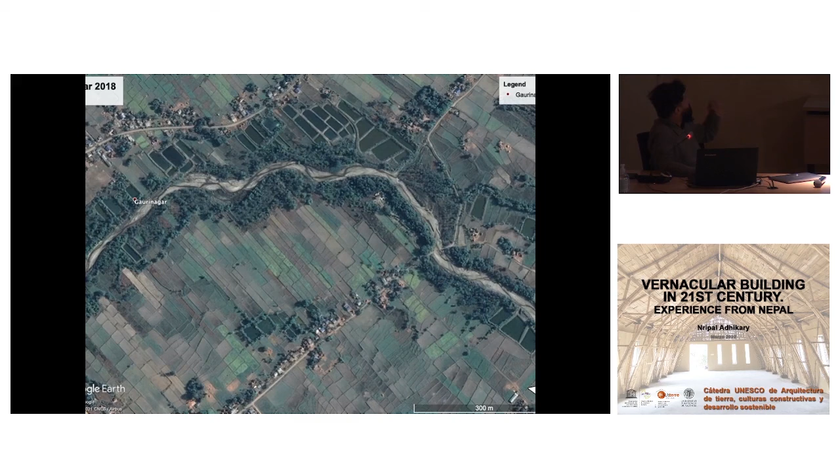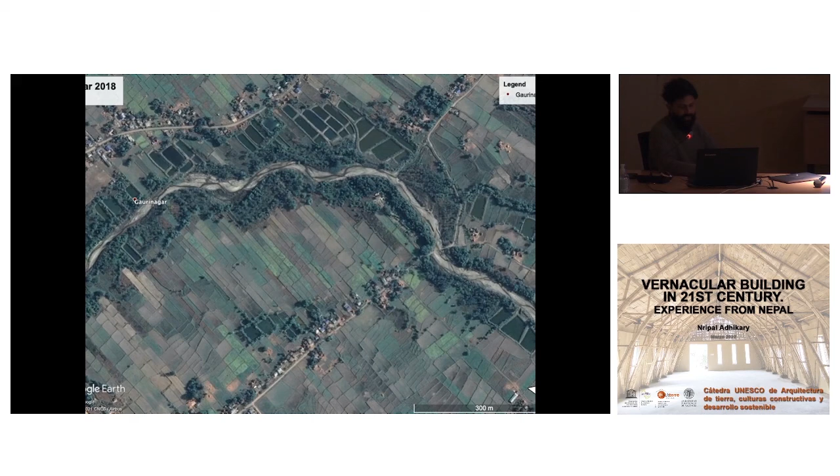Then slowly we started planting bamboo, and now we have this beautiful result, everything's coming back, the birds are coming back, the people are coming back before many people had left. So we have created 2 kilometers of river with bamboo plantation that creates a very interesting cycle, a closed loop.

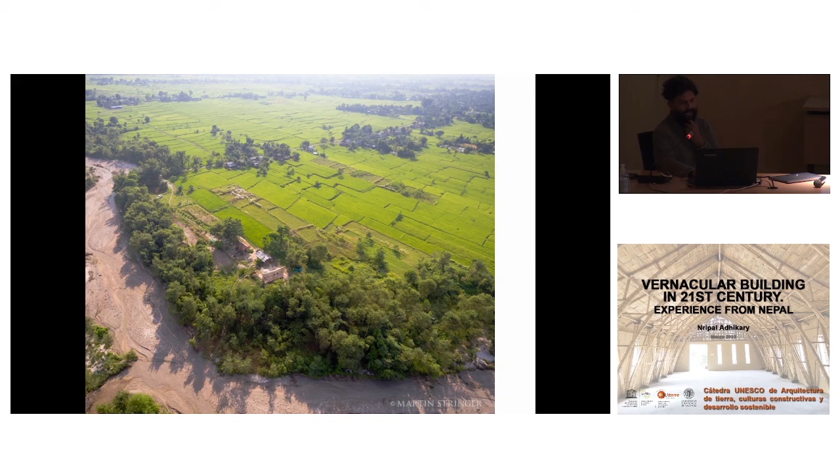So that's about it. We're always pushing the envelope, we do workshops, we teach, and I also ride a bamboo bicycle. This is an electric bamboo bicycle. Modern industries today are polluting, but I think the future industry could be like this, something good for the planet and for the environment. Thank you. Here's another bicycle that we've done. Thank you so much.

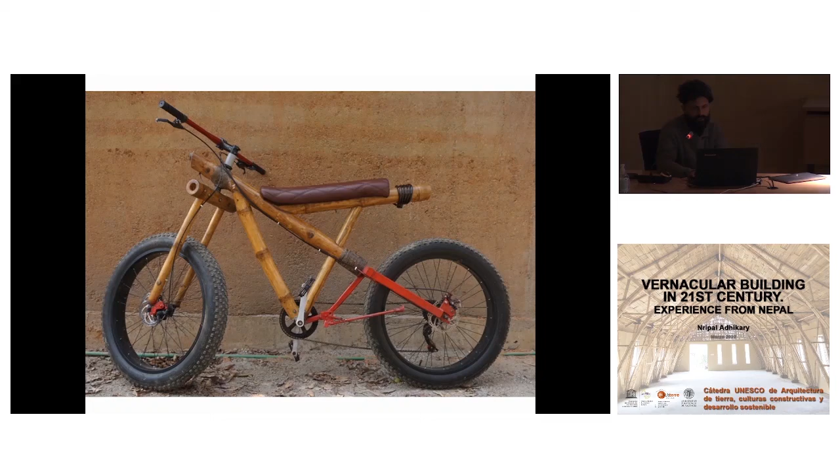Because I saw in some images there were bamboo beams or bamboo inserted in the walls. I didn't understand, but there were some images with bamboo insert. If we do insert it, it's mostly for half timber construction, like this example here. No, this isn't inserted, it's connected outside. Here we have half timber, using bamboo on the back, woven bamboo which we then plaster. In that case we do put it inside, but not for reinforcement - for example, in the worst case, if there's termite damage or anything, we can remove that wall section and replace it again, so it's not a problem.

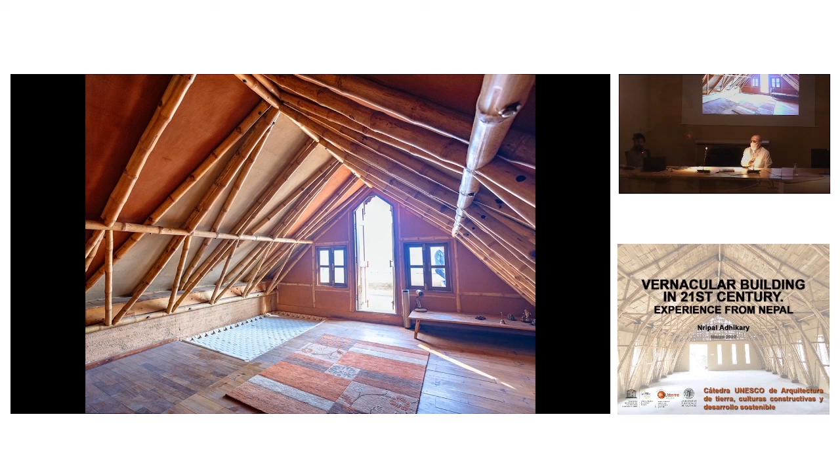Thank you. Has there been an earthquake after all of these buildings were built? Yes, the first two buildings experienced one. But after that, no. I mean, it's only been 5 years, so I hope it won't come for another 100 years.